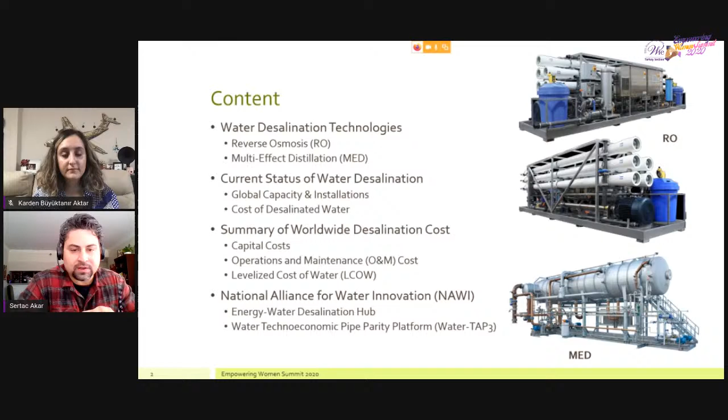So to start with, why is water desalination important? 75% of the Earth is covered by water. However, only 1% of the world's water resources are fresh water. So water scarcity is increasing at an alarming rate, requiring a systemic approach to bridge the supply and demand gaps. Conventional demand and supply side management options can help alleviate scarcity, but the pace of change is too slow. So luckily, there are technical and economic instruments to bring supply and demand into balance. And desalination can produce high quality potable water and suits the needs of large cities.

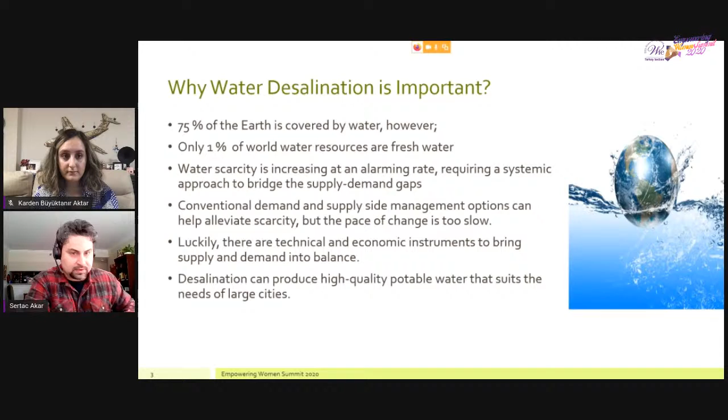So to look at the sources of water, apart from seawater, there are non-traditional sources which can be used for desalination, such as industrial, municipal reuse, conventional produced water, unconventional produced water, agricultural water, mining, power, and brackish water. So these are actually 9 main non-traditional sources that we take into account when we think about water desalination.

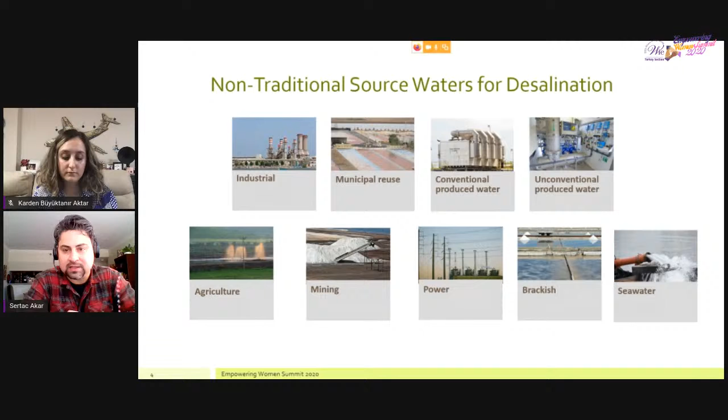And so water desalination technologies include some stages, such as a pre-treatment stage followed by a main treatment stage, and then maybe a higher recovery treatment stage, and finally a post-treatment stage helps us to desalinate the water. And we also need to consider the waste disposal, because all desalination technologies have high concentration waste at the end.

So if you look at this flow chart in brief, some of the main pre-treatment stages are coagulation and flocculation, lime softening, sand filters, microfiltration, ultrafiltration, and these are followed by the main treatment stages. And main treatment stages are basically electric or thermal. In electric methods, the most common ones are reverse osmosis and electrodialysis. And we also have some electrodeionization and ion exchange methods. There are some new technologies involved in the electric methods, which are forward osmosis, capacitive deionization, and electrodialysis metathesis.

And the other important treatment technology is the thermal technology, which includes boiling water and generating steam and condensing the steam into desalinated water. Multi-effect distillation is one of the most common thermal methods, followed by multi-stage flash. And there are also new technologies called membrane distillation, which uses a membrane similar to the RO technologies in thermal methods. These main treatment technologies are followed by high recovery treatment technologies, such as brine concentrators, crystallizers, or high recovery reverse osmosis systems.

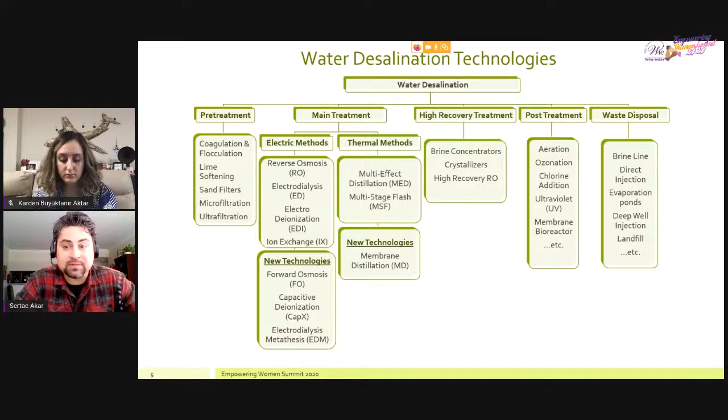And after we clean the water, we also create some waste. The concentrate is highly concentrated water, which you don't want to just expose to the environment directly, and you need to have some waste disposal strategies. The most common ones are brine line, direct injection, using evaporation ponds, deep well injections, or even sometimes landfill. So this is the main summary of what water desalination looks like.

If you look at the details of these technologies, as I mentioned, there are two main categories of technologies in the main treatment stage, such as multi-effect distillation or multi-stage flash technologies, which are under the category of thermal desalination, and reverse osmosis and electrodialysis under the category of electric desalination. So thermal desalination basically uses steam generation and condenses that steam into desalinated water throughout many stages, and then keeps the highly concentrated water as waste and disposes of it with the disposal methods that we described earlier.

But the electric technologies, which are more common, use electricity for the main process instead of thermal, and they mostly use membranes. For example, RO systems use a spiral-shaped membrane design, which allows the permeate to pass through the membranes, and the concentrate stays inside the flow channel and discharges out of the RO cartridge unit.

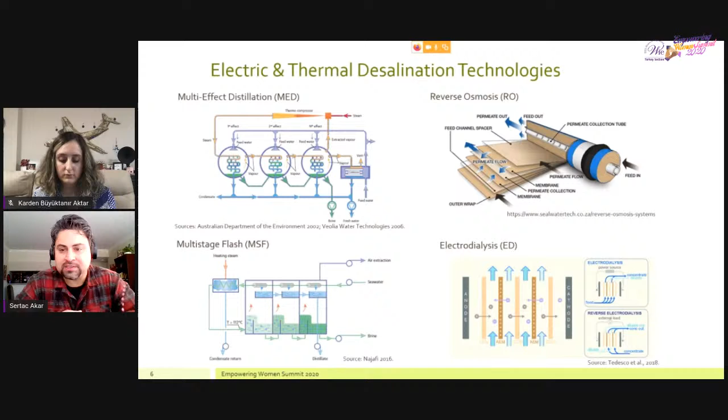So after giving this brief introduction to these technologies, let's have a look at the typical layout of a desalination plant for seawater desalination. This is an example from Tampa Bay, Florida, United States. As you can see, this starts with the intake from the ocean. And then this plant uses the cooling water of an existing power plant, the Big Bend power station, as the source water. And then it passes through certain stages of pretreatment, such as

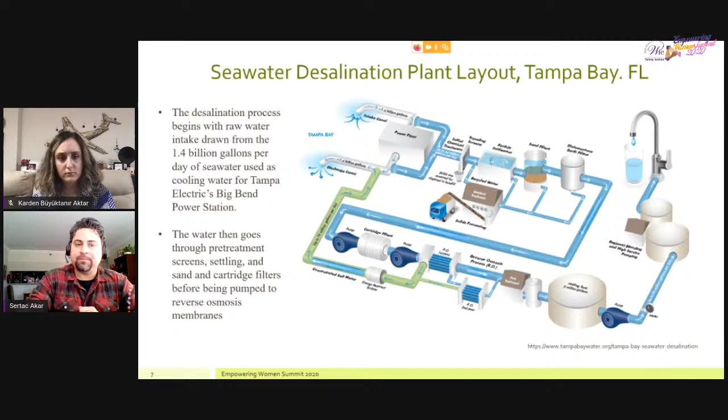the sand filters and particle settlement, and this cleans up the water at the first pretreatment stage up to a level. Then comes the main treatment stage, starting with a cartridge filter and the reverse osmosis stages, and this gives us the product water. This water is collected in a holding tank. This tank is designed at 5 million gallons in capacity, and the wastewater is sent back to the brine line, which is discharged back into the ocean. So this is a very typical example of reverse osmosis seawater desalination.

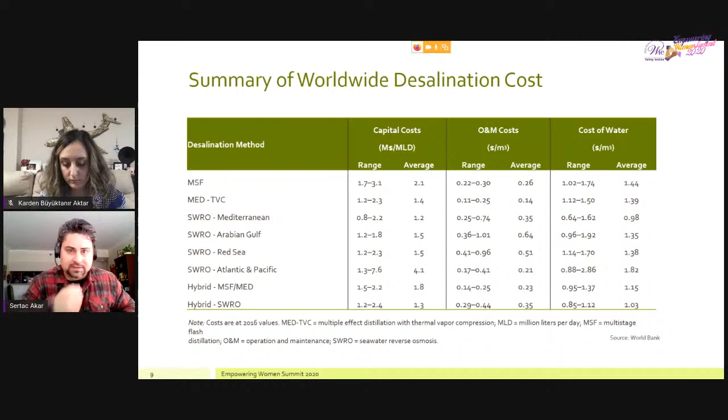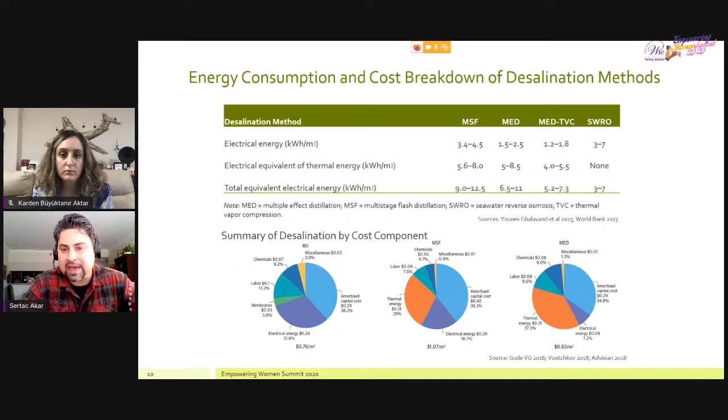And these pie charts show the total cost in terms of components. The capital cost is the main driver in RO and also in the thermal desalination technologies. As you can see, the electrical energy cost is less for the thermal systems, but higher for reverse osmosis technologies. And there are also membrane costs, labor costs, chemicals consumed in the processes, and some contingency or miscellaneous costs that you need to add to the total cost breakdown. So I think this brings me to the topic of the National Alliance for Water Innovation platform and the Energy-Water Desalination Hub, which NREL is involved in.

So I will give you a brief introduction to NAWI, the National Alliance for Water Innovation. This is a consortium including 3 national labs, 18 universities, and 12 industry partners, and many other contributors. The Department of Energy in the United States announced, actually 2 years ago, the funding opportunity for this energy water desalination technology. And then the consortium won this award for $100 million in funding for up to a 5-year project lifetime.

Now this platform is trying to address the water security issues and the economic competitiveness across all economic sectors in the United States, and they are trying to focus on early stage R&D water treatment technologies and ways to treat non-traditional water sources. In this concept, NREL is involved in three main tasks. The first is the water data and analysis management system, which includes collecting all data available across the United States, including power plants, operators, universities, research, and all industry partners, including manufacturers of these membranes and technologies.

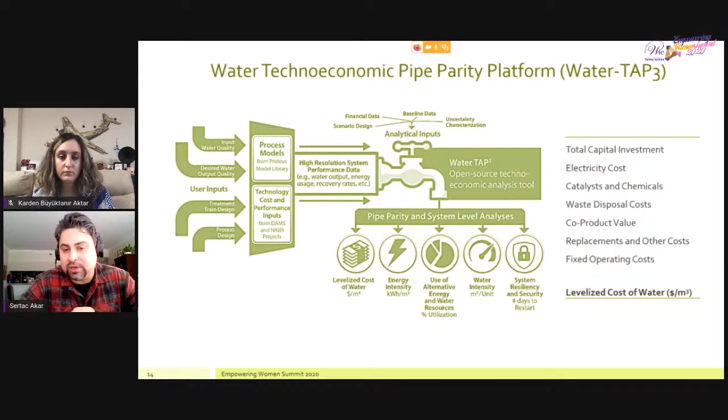So to give you more idea about how the platform works, we collect the data to fit into this framework, and we have the main treatment stages and the value streams. We calculate the cost of gathering the water, treating the water, and creating the value stream, such as distributing that water to the market, plus any additional value streams we can collect, and also the waste treatment and disposal stages, which include building brine lines, drilling deep wells, and preparing landfills for solid waste.

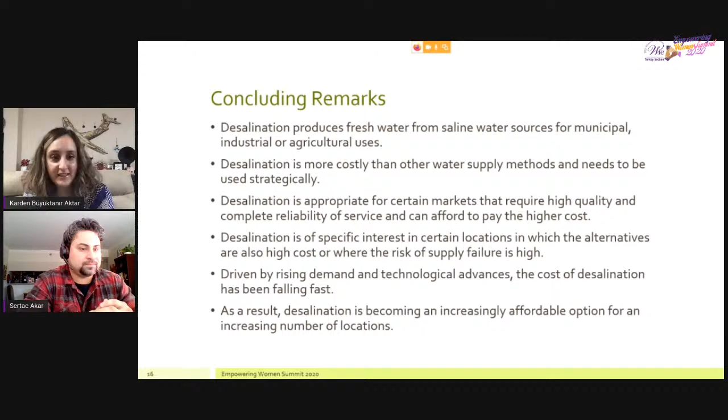Thank you very much. It was a very interesting and educational presentation. I learned a lot from it.

We have no question right now, but I have one. Do you know the number of desalination plants all over the world? In America, as I saw, there are many, but in Turkey, I never saw any desalination plants. Do you know about Europe?

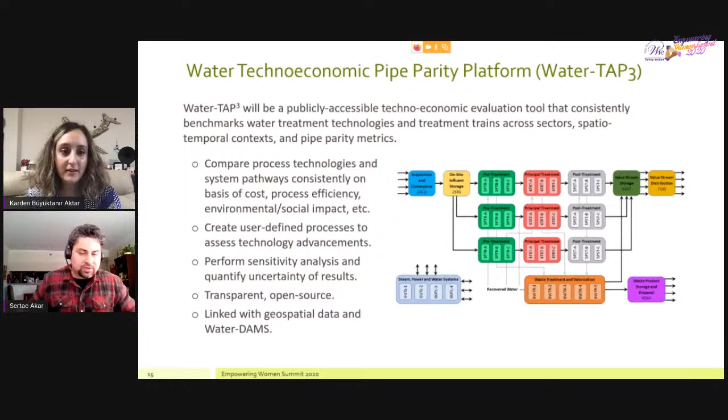for single plants, I know examples from the biggest plants in the United States. The biggest plants usually have 50 million meter cube per year. So when you look at this number, if you divide it by 365, it's usually like 0.2 or 0.3. So you can multiply this number by at least 5. And roughly you may say between maybe 100 to 500 plants exist in the world.

Roughly. I mean, I don't know the number by heart, but the biggest plants in the United States have roughly 50 million meter cube per year capacity. Thank you.

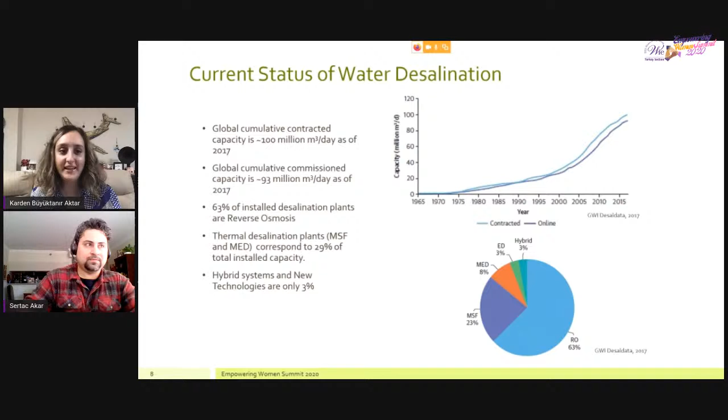Yeah, that's true. We have no other questions. Then I can take your final remarks and we can finish the session. Yeah, that sounds good. Actually, I tried to speed up a little bit just to be on time, but I was maybe a little fast. I just finished a little earlier.